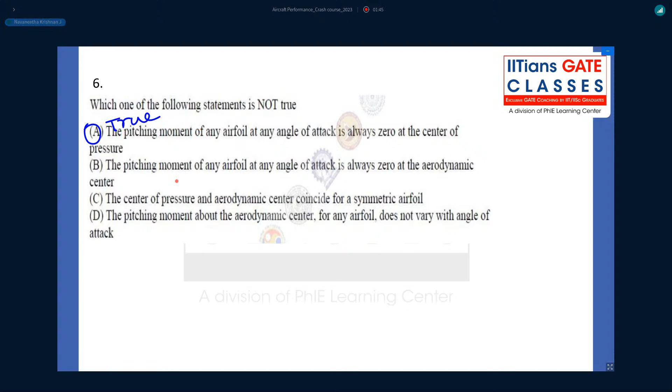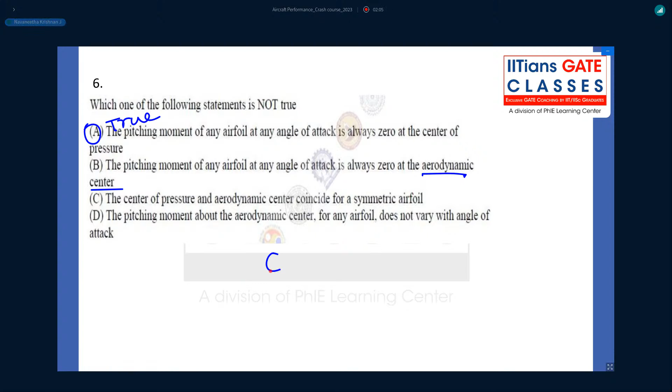Option B, pitching moment of any aerofoil at any angle of attack is always zero at the aerodynamic center. The definition of aerodynamic center is pitching moment about aerodynamic center is constant. It doesn't change with respect to angle of attack or Cl. Cm is constant about aerodynamic center.

Dou Cm by dou alpha is equal to 0. Dou Cm by dou alpha or dou Cm by dou Cl is equal to 0. So it doesn't vary with respect to any angle of attack or Cl. That is the definition of aerodynamic center. So option B is false.

Option C, if you see, center of pressure and aerodynamic center coincide for a symmetrical aerofoil. If you see at zero angle of attack, there is zero lift. The pressure distribution is uniform throughout. So the center of pressure and aerodynamic center remain constant. Okay. There is no moment about that point. So there is no shifting of point required for a symmetrical aerofoil. So option C is also true.

Option D, the pitching moment about aerodynamic center for any aerofoil does not vary with respect to angle of attack. Yeah, it is constant and doesn't vary with respect to angle of attack. That is the definition of aerodynamic center. So option D is also true. So the only option which is not true is option B. So option B is the correct answer. Okay.

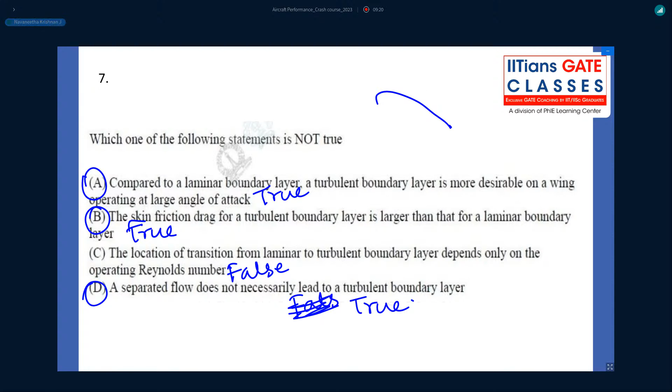Next. Question number 31. Consider a straight wing with rectangular planform of aspect ratio 10 with NACA 0012 aerofoil. That means it is a symmetrical aerofoil. The span effectiveness factor for this wing is 0.95. Assume the flow to be incompressible and governed by thin aerofoil theory. The lift coefficient of this wing at an angle of attack of 6 degrees is blank, in 3 decimal places.

If you see, they have given a symmetrical airfoil. For a symmetrical airfoil, CL versus alpha is like this. So the lift coefficient at zero angle of attack is 0. So CL for this wing can be written as AW into alpha W, the lift curve slope into alpha. Now we have to find out the lift curve slope of the wing.

It's expressed in terms of the lift curve slope of the aerofoil, where A0 is the lift curve slope of the aerofoil. If AW and A0 are in per radian, we can use this relation. According to thin aerofoil theory, A0 for any aerofoil can be written as 2 pi per radian. So if I substitute 2 pi per radian, E given as 0.95, and aspect ratio given as 10, I get the lift curve slope as 5.1905 per radian.

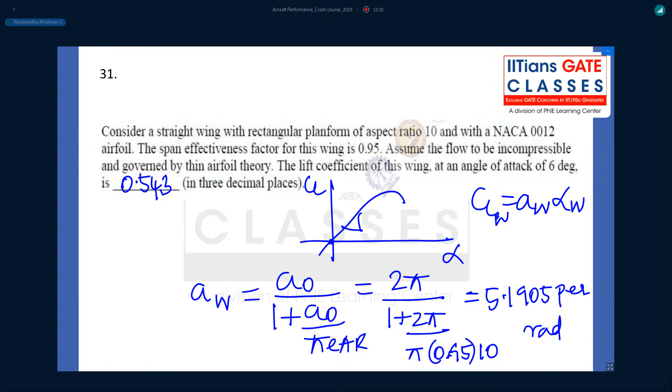Next question. Question number 39. A pilot was flying a single engine propeller aircraft maintaining a steady level flight at a lift coefficient CL equal to 0.5 at an altitude of 500 meters. Due to some emergency, at the same altitude, 500 meters, the pilot has fully deployed the landing gear. If the pilot wants to maintain steady level flight at the same CL and at the same altitude, which of the following control actions should the pilot undertake?

Option A, move the elevator up and decrease the throttle. Option B, move the elevator up and increase the throttle. Option C, move the elevator down and decrease the throttle. Option D, move the elevator down and increase the throttle. If you see, initially lift was equal to weight and thrust equal to drag, because they were maintaining steady level flight. Now suddenly, consider this is the airplane, the pilot has deployed the landing gear.

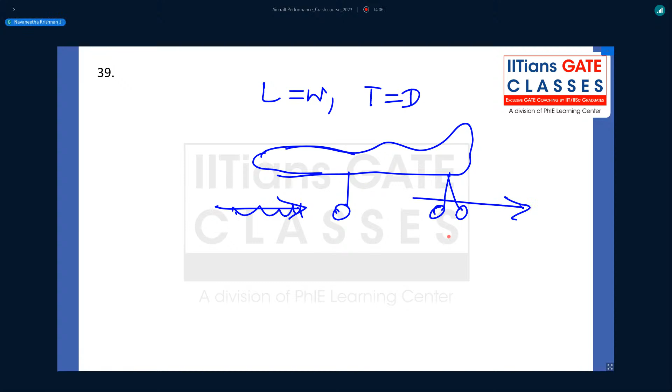Okay. Pilot has deployed the landing gear. When he has deployed the landing gear, what happens? There is an increased drag, because flow is affected by the landing gear. So there is an increased drag.

If there is an increased drag, then to overcome that increased drag, if the pilot has to maintain steady level flight, thrust has to be increased. So thrust produced by the engine has to be increased. So if thrust has to increase, the pilot has to increase the throttle.

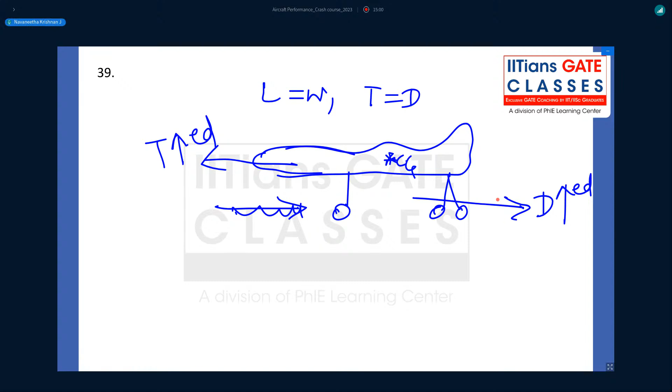Not only that, that increased drag occurs at a point below the CG. Somewhere here is the CG axis. The increased drag acts below the CG axis. So this creates a nose down moment about CG. There is a nose down moment and the pilot has to maintain steady level flight, so what does the pilot have to do?

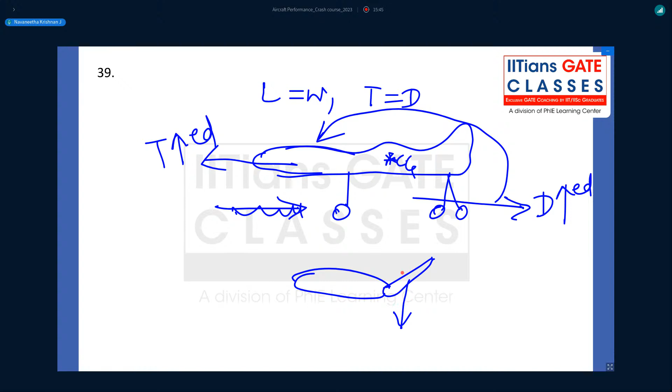Pilot has to deploy the elevator to overcome that nose down moment. So pilot has to deflect the elevator upward like this. When deflecting the elevator upward, it creates a negative lift, lift in the downward direction, because there is a negative camber over here. CG is somewhere here, so it creates a nose up pitching moment for the aircraft.

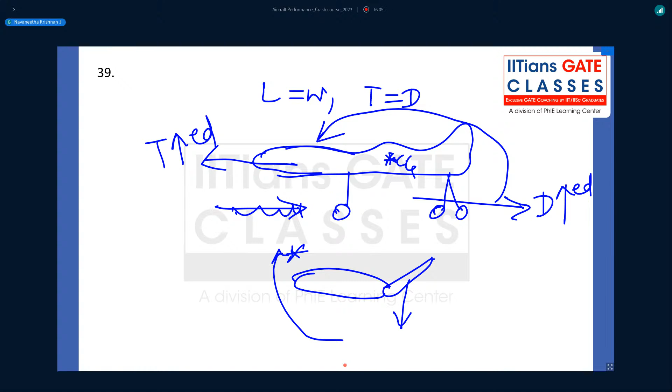So deflecting the elevator upward and increasing the throttle or thrust can maintain steady level flight if the landing gear is deployed. So the only correct option is move the elevator up and increase the throttle. So option B is the correct answer. Okay. Any doubt?

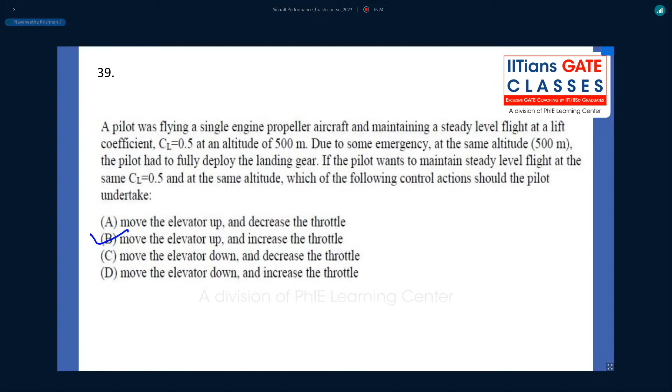Next. Question number 40. A conventional low-speed aircraft has the following aerodynamic characteristics: CD naught equal to 0.02, e equal to 1. The aircraft was flown to maintain a steady level flight and for minimum thrust required, lift coefficient CL equal to 0.8. The numerical value of the aspect ratio of the wing is blank, in 3 decimal places.

They have given the condition, it is minimum thrust required. Thrust required minimum is nothing but the drag minimum condition. Drag minimum condition is nothing but CD naught equal to CDi. CDi can be written as K CL square. K can be written as 1 by pi e AR. So it is CD naught equal to CL square by pi e AR.

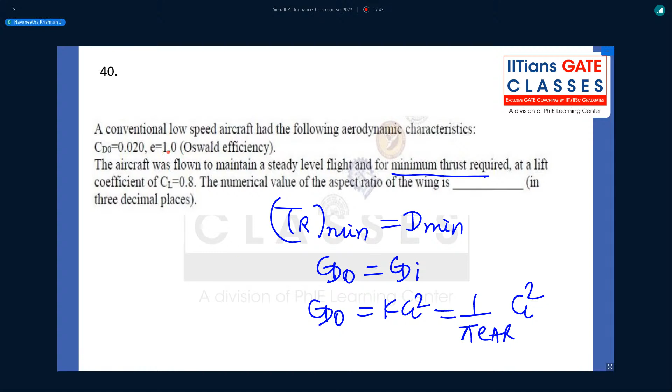CD naught is given as 0.02. e is given as 1. Aspect ratio we have to find out. The lift coefficient is given as 0.8. Only unknown is aspect ratio. From this we get aspect ratio as 10.186. Rounded to 3 decimal places, it is 10.186. The answer is 10.186. Any doubt?

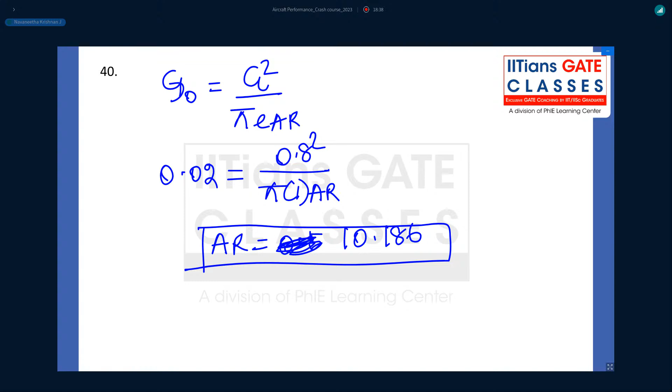Next. Question number 43, 2017. An aircraft is to be designed to ensure it has enough excess power to achieve steady climb at a flight path angle of gamma equal to 10 degrees, maintaining CL by CD equal to 10. The numerical value of thrust to weight ratio of the complete aircraft to meet the above requirement under standard atmospheric conditions will be blank, in 3 decimal places.

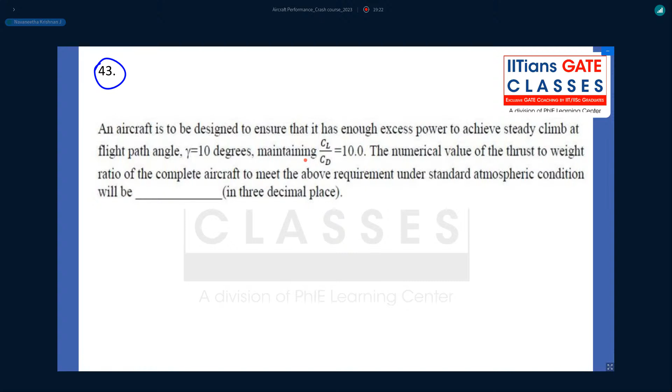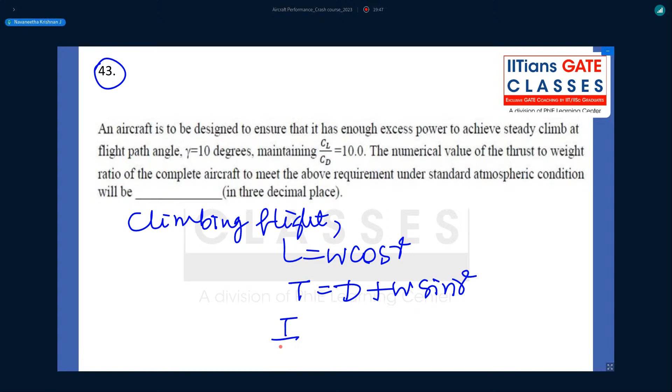They have told it is climbing. For climbing flight, we know that lift is W cos gamma, and thrust is drag plus W sin gamma. So taking weight on the other side, thrust by weight is equal to drag by weight plus sin gamma. From the first equation, weight can be written as lift by cos gamma.

Substitute it here. So thrust by weight equals drag divided by lift by cos gamma, plus sin gamma. The cos gamma goes to the numerator, and drag by lift can be written as 1 by L by D, plus sin gamma. Gamma equals 10 degrees and CL by CD is 10, and L by D is CL by CD. So it is cos 10 divided by 10 plus sin 10.

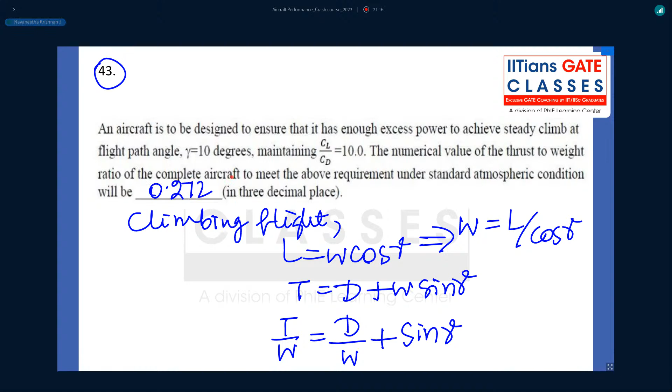We get the answer as 0.272. Rounded to 3 decimal places, it is 0.272. Any doubt?